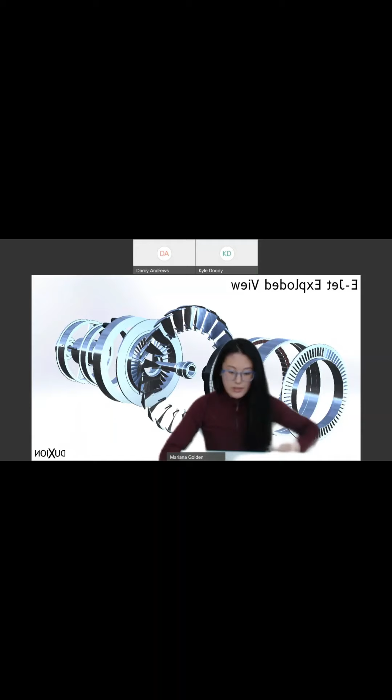All right. So I think right now you're the presenter. So okay, there we go. All right. Can you see my screen there? Yeah, we sure can. And is that showing you the full screen? We're still getting your tabs at the top. But it is full screen. Okay, I don't know if it's a particular setting on WebEx. I think you should be good. All we can see is, you know, your tabs at the top of Chrome. Okay, gotcha.

All right, so hi everyone, I'm Mariana Golden, and I'm a mechanical designer at DuXion Motors, and this presentation is on how a student team taught me that success requires you to plan for failure, and specifically multiple failures throughout the course of the design process.

So Paradigm Hyperloop was the student team that I was on. I was actually on the Northeastern side of the team. It was an international collaboration of students from MUN, CONA, and Northeastern, and that was for the SpaceX Hyperloop Competition. The team participated in Competition 2 and Competition 4, but I'm mostly going to be talking about Competition 4. I'll let you know if I'm using examples from Competition 2.

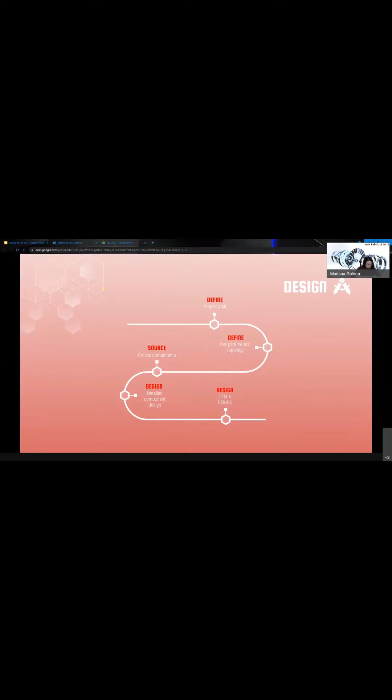So one thing that's actually really important that gets forgotten more than people would think is defining project goals clearly as your first step, because sometimes people will have a different vision for the team, and if you aren't clearly aligned on them, that can actually affect product topology, which makes it really hard to design if you're designing things with different goals in mind.

So examples of how project goals can affect topology: we had the competition 2 pod, and that was actually designed for levitation because that's what that competition had. There were kind of 2 separate streams, whereas competition 4 was solely focused on top speed. However, we decided to focus more on scalability for an actual Hyperloop concept. So we were using a motor that's a bit more realistic. It was an EV conversion motor, or a motor commonly used for that application.

Whereas the winning team for multiple years, TUM, they used to be called WARR, a German team, would always make really small pods with teeny tiny motors so that it was super light. And basically that decreased their braking force and made it a lot easier for them to safely get to top speed and stop. But those are 2 very valid ways to approach it. It was just decisions that each of those teams had to make.

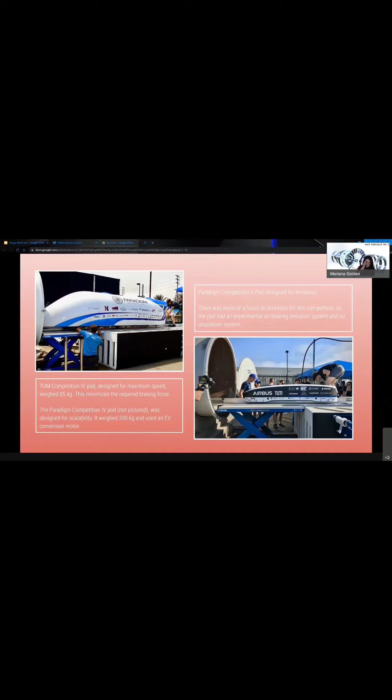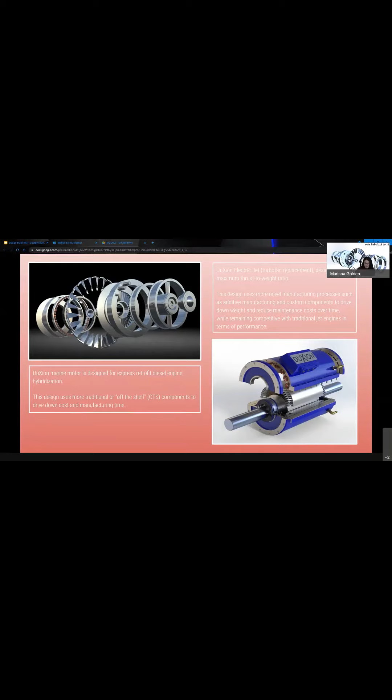At DuXion, it's actually also really important for us to define project goals clearly because we have multiple different projects with different goals. So one of our projects is the electric jet, which is a turbofan replacement, and that's designed for maximum thrust to weight ratio. This design uses more novel manufacturing processes and custom components. So it'll use additive manufacturing, and it's not designed to be manufactured cheaply, whereas the marine motors we're designing are designed to use more off-the-shelf components so that we can design them quickly and manufacture them quickly.

So once you define your project goal, the next 2 steps really are to define your topology and define your key parameters. From here on out, I'm going to mostly be using Hyperloop as an example. So this is a screenshot of a page from the Hyperloop rules and regulations, and that gave us a cross-section view of the SpaceX Hypertube. And that used an I-beam, which we clamped to for propulsion. So we're not riding on a track. It was clamping to an I-beam. And they had keep-out zones for braking for safety reasons.

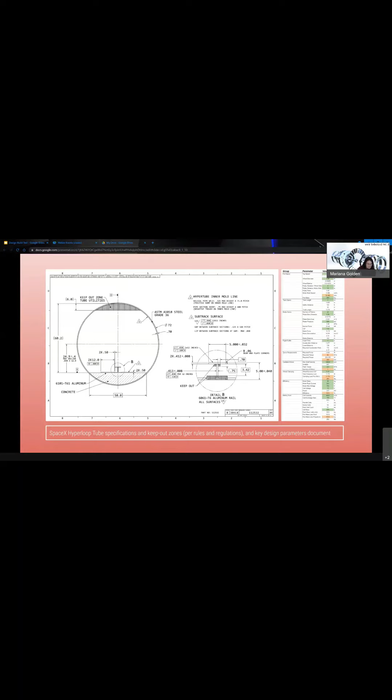And when you get key parameters, there's really 2 types of design constraints you have to design around. There's fixed parameters, which are I-beam dimensions, tube length in this case, basically environmental variables that you can't control and you have to design around. And then target parameters that you define, such as, in this case, mass, top speed, and pod length. Those are variables to target within reason. So we would always have a spreadsheet full of calculations, and that was good for team record keeping, and also it was really easy to plug numbers in and try things out when we were trying to source different components.

And then the next step that I would recommend is to source critical components before you get into the meat of the design. A critical component is basically anything that's off the shelf but has a long lead time and might need custom modifications, but it's essential to the design. So basically a part that you design other parts around. On the pod, that would have been the motor, inverter, shocks, some of the bearings that were hard to source, pulleys and belts. We ended up sourcing the belt too late and had to do a lot of scrambling and redesign since it was a lot wider than we had designed for.

Components that aren't off the shelf but need to be custom manufactured and have a long lead time might also be critical. In that case, that might have been the inverter enclosure because it was made of carbon fiber, and that has a really lengthy, involved manufacturing process. The wheels were also critical because they needed to be machined, coated, and then balanced. And the motor needed an adapter to connect to one of the pulleys because the output shaft was splined. So watch out for couplings because they can be a long lead item that you might not think of. And if stuff needs an extra operation on top of just machining, like our drive shaft needed to be hardened, that can also take a long time.

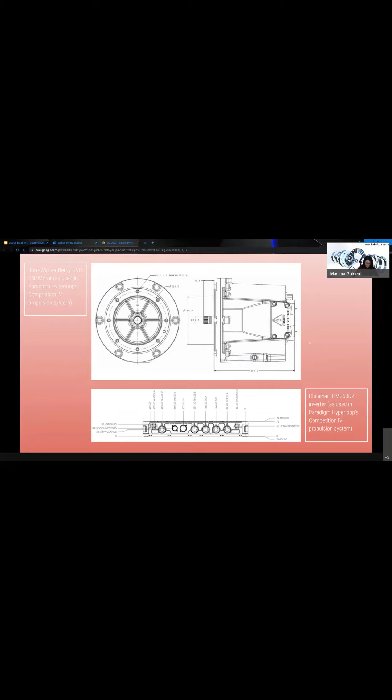Once you source your critical components, you can go into the detailed design phase. So that's where you get into detailed component design, where you're designing basically things like brackets, mounts, framing that are being designed around the critical components that you're not getting manufactured custom. And these components more typically can be made with traditional machining operations in your standard shop, like the MUN shop. So kind of mill, lathe, CNC laser cutter, water jet, etc. These are the components that you'll be designing around the critical components.

And make sure when you're doing this to start sourcing fasteners, like not just using, if you're using SolidWorks, their smart fastener thing, but actually going and physically sourcing those fasteners. Because that'll make it a lot easier in the long run, so it's not an extra step you're doing on top, and also to make sure that they actually exist. And while you're doing this, make sure everything meets the factor of safety for whatever standard you're designing for. Because we definitely made some mistakes on that end, and that can really be a showstopper.

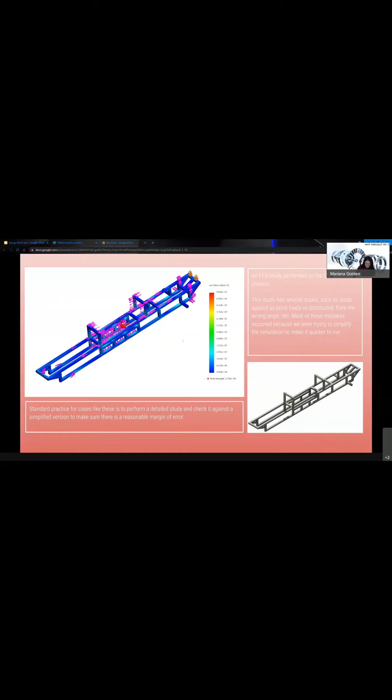We got roasted at SpaceX for this one, not only because the FEA didn't have the loads applied properly, but also because we did all the manufacturing drawings, but did not check with the manufacturer that they could hit the weld tolerance required. So that made a lot of components not be able to fit, and also significantly reduced the yield strength of the aluminum because we didn't get it heat treated afterwards. So that's something to look out for.

The chassis design was led by Connor Walrath, who worked at SpaceX and is now working at Tesla. And there's a few people that I mentioned in this presentation, and all of them have really cool jobs now. So that was a really great thing that the team did.

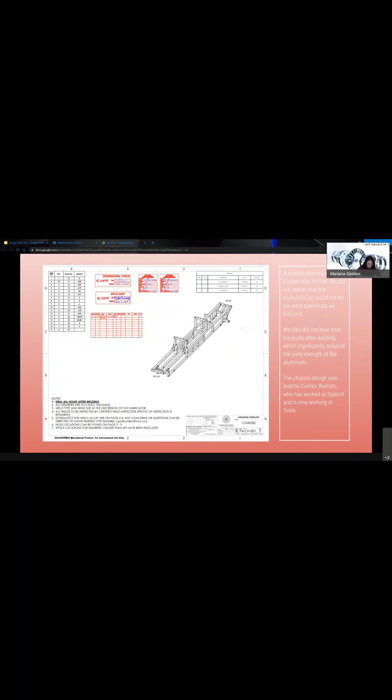This is an infamous mount block designed by my friend Rowan and me for the Competition 2 pod. And the issue with this component was that there's a lot of operations here, there's a lot of material, and it was not really designed with the milling process in mind. It was physically machinable, but really difficult and really expensive and took a lot of stock.

And one of the big challenges was that this is a through hole all the way through this entire block, meaning that you need to pass a drill bit all the way through this entire thing, and once you get to the bottom of a hole that long, the drill bit will start to walk and mess up your tolerances. And I think what ended up happening was having to drill the hole from each side really carefully, which was tricky because there was a through rod connecting them both.

Rowan later became the competition 4 mechanical lead and is now an engineer at BreathSuite. And I show a mount that he designed for competition 4 that's kind of the opposite of this.

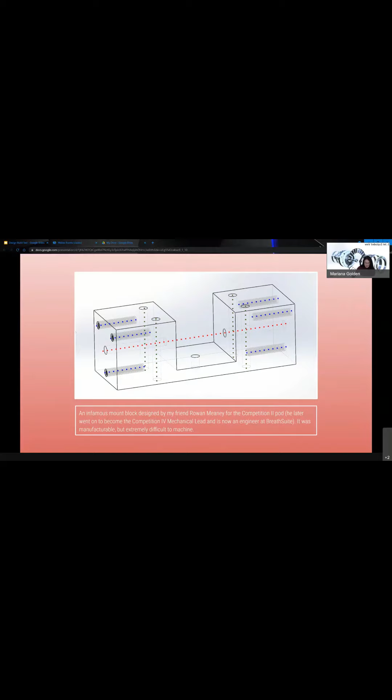So once you get through the detailed design phase, you get into the building process, and by that I mean 75% of it is manufacturing and contacting manufacturers and getting into the shop. 15% of that is not losing all the parts you get, so organization, and 10% is actually building.

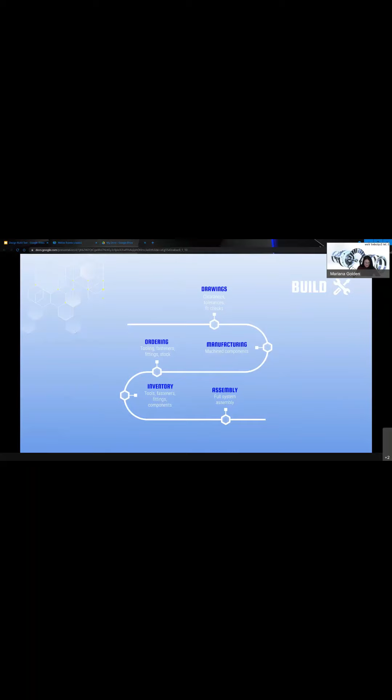When you're working on manufacturing drawings, don't forget tolerances and clearances. It's really easy, even if you know that it's a thing that's going to come up, to forget about them, because they're not a visual feature you can see. So if you already had a structural or mechanical design review and think you're ready for manufacturing, you're not. You should have a second design review, or you'll have multiple, but you should have one that's explicitly for manufacturing and goes over tolerances, clearances, and sometimes surface finishes and machining or manufacturing operations. Tolerances and clearances can also affect FEA results, so watch out for that.

So this is another mount block designed by Rowan Meaney, and this one is a really clean design. It was designed to be manufactured on a CNC machine. And since there were a ton of these teeny tiny brake housings, they were sent to an external manufacturer because it would have been tricky to do in-house, and they needed to be as light and thin as possible because there were so many of them, so that would have really added to the weight.

So yeah, once he manufactured these and we got the parts, they were supposed to have basically a sleeve fit into them, and you could just see the sleeve slowly sink into them because they were really nicely toleranced. So that's how things should work out.

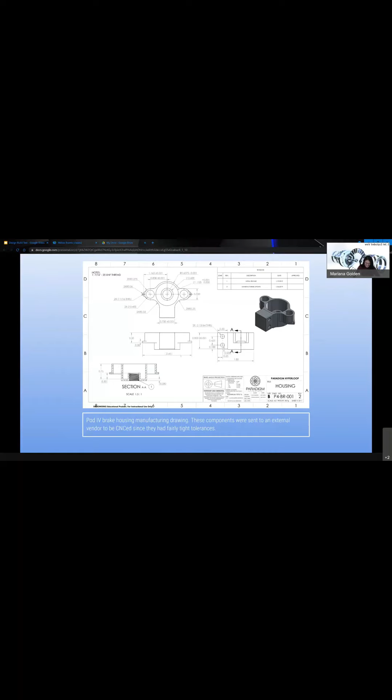And here's a really important note, and if you take anything from this presentation, I would say take this, which is that technicians, machinists, suppliers, and manufacturers are key. They're worth their weight in gold because engineers cover a breadth of knowledge, which is mostly conceptual, and people on the manufacturing side have a real depth of knowledge.

Engineers tend to think that they're better or smarter sometimes than technicians, machinists, and suppliers, and that is not true. They have a very different skill set from you, and a lot of them have been in whatever field or craft they're in for their entire life. So where engineers have a calculated knowledge of a lot of things, these people have an intuitive understanding based on years of experience. So they can really speed up the process for you.

And this also comes in really handy down the line if you talk to a lot of manufacturers and machinists, because familiarity with manufacturing processes and relationships with manufacturers helps a lot with innovative design. A lot of innovations come from using an existing technology for a totally different purpose, and interacting with this supply chain side of engineering will give you, first of all, a mental inventory of what technologies exist and give you those connections for the future.

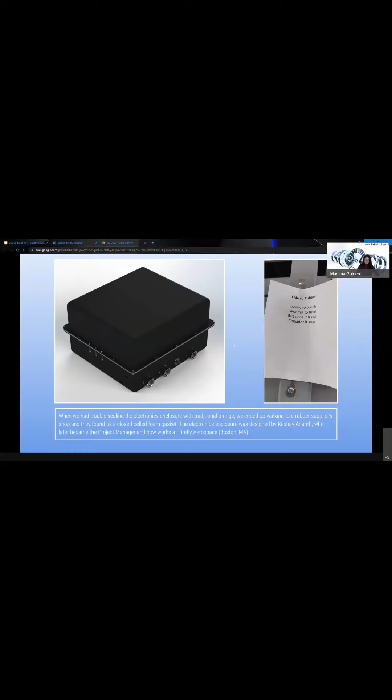And that's why it's fun to go into these places, because you never know what you're going to run into, and they just have some characters there. It's really fun, and if you know how to talk to them, they get really excited and help you in a way that design engineers don't. It's just an important perspective.

This is another example of a design that I don't really think was feasible in the long term, but competition 2 used air skates that used a flexible material on the bottom. It's basically a bag that inflated and lifted the wheels up off the ground slightly. And the material we ended up using for that bag was ripstop nylon, which is a waterproof material commonly used for parachutes. We used a sewing machine to puncture holes in the waterproof coating to let air escape and create a thin film of air under the skates to reduce friction between the bottom of the skate and the track.

And they also used a thin mesh in the middle to diffuse the air and distribute it evenly, which is commonly used in filtering applications. So this particular design was not practical at high speeds. However, sewing machines and nylon fabrics are used in a lot of heavy-duty industrial applications because of nylon's high tensile strength. So it's a lot of things that you wouldn't think of. And if you talk to a manufacturer or supplier, they'll just have these things that probably don't come up in your material sciences course, but are actually used in industry a lot.

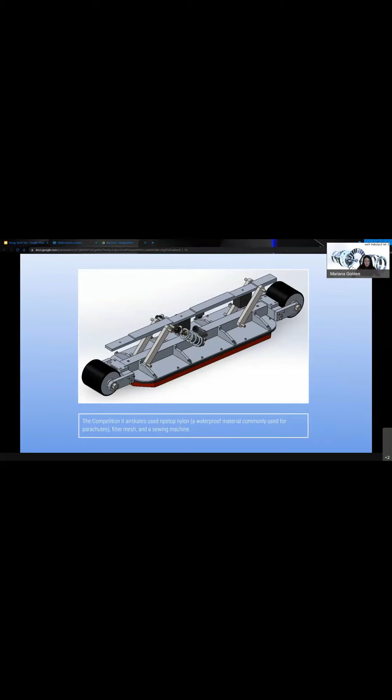So after that, when you get onto the building stage, some suggestions are to maintain an organized bill of materials and use it as a checklist when you begin to receive parts and take inventory. And that should include every fastener and fitting that you have. When you start getting your components, take inventory and mark off everything you get and everything that's late, because it seems like a lot of effort, but when you're sitting at a pile of hundreds of miscellaneous bolts and spend like 6 hours organizing them, you learn to make an organized BOM.

A tip for sourcing fasteners is McMaster-Carr, because it might not be the cheapest option and you might not actually order bolts from there. But if you use it as a fastener inventory, they have every kind of common fastener under the sun and some actually kind of cool ones. And you might find some types of fasteners and tooling you didn't even know existed. And then you can go and look up that kind of fastener and see what exists on other sites.

This is an example of one of my favorite tooling types that I had no idea existed, I was just throwing stuff into the search bar - it's a reverse counterbore tool. It has a separate shank and the counterbore top slots into it, so you put the shank into the drill chuck, then pull it backwards to counterbore the backside of the hole. A machinist might not love you if you walked in with that, but if you order it and figure out how to use it properly, it's cool to find tooling like that and search it up on websites that might be cheaper.

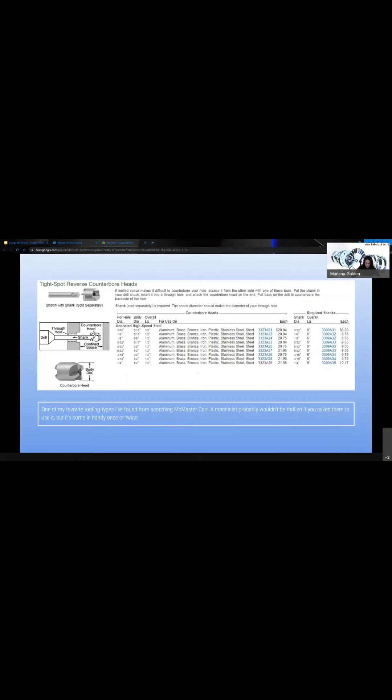Once you get onto assembly, a couple lessons learned: mechies, don't forget that the electrical side of the team exists. Communicate with them and make sure there are plans for mounting electrical routing, connectors, and fittings. Bend radius of wires is a big one that will get you, and it's sometimes hard to CAD that up or guess, so take a worst case guess at least so you have space there. Come up with assembly procedures beforehand, and know if something's too heavy to safely lift, you need an assembly jig or a gantry with loading straps and hooks - that should be in your plan before you order all the components. Make sure there's enough clearance for hands, tools, and fastening, not just the bolt head.

So this is our full pod for assembly.

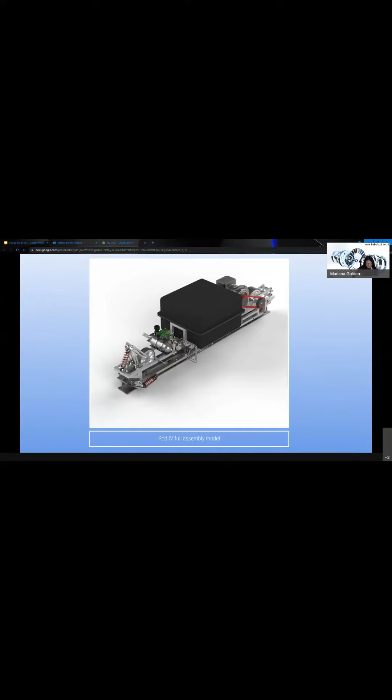When you get onto the testing phase of the design process, test rigs and SOPs - safe operating procedures - have a design and manufacturing scope all their own, so factor that into your project budget and timeline. Fit checks are probably not going to go right the first time, especially with a prototype with a lot of different components - the more components you have, the more tolerance stack up. If you have parts connecting in different ways or with surfaces flush against each other, it's not just the individual tolerance from surface to surface, it's the entire assembly tolerance stack up, so they can all affect each other.

If one part is a little bit off, they'll all be a little bit off and nothing will fit. So there may be some flexibility needed, especially if students are machining parts - try to machine parts a little bit oversized rather than undersized, just so you have a little material to take off in case it doesn't fit. Or at least double check everything multiple times with calipers and buy enough stock to make multiples.

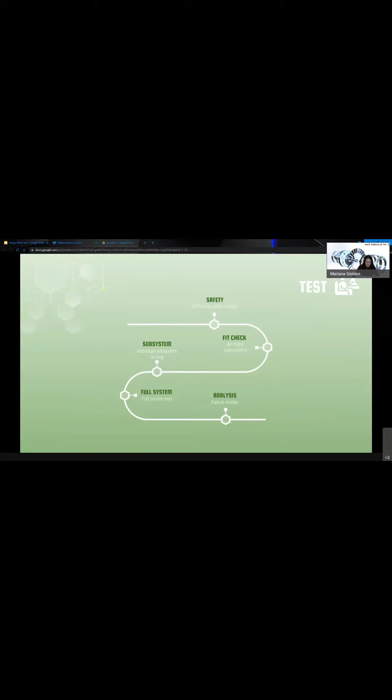Safety checks and fit checks come before any actual subsystem or full system testing. Make sure you have a safe operating procedure document written for each assembly and testing operation. These will include hazards - really basic things like pinch points on mechanical assemblies, loose clothing or hair - and might get into hazards like high voltage or high pressure systems, depending on the nature of your project.

Most of these SOPs were written by Jack Chapman, who's currently working at Hatch in Montreal.

Fit checks are pretty self-explanatory, but ours led to a huge amount of issues and rework. That's something you can try to mitigate beforehand, but really you should build time into your project timeline to fix issues if needed, and make sure to order extra stock, because if students are machining stuff, there's definitely going to be parts that get messed up at first.

To name a few examples, our suspension brackets were almost impossible to install because we had gas springs basically forcing this bracket up and into the shaft of the wheel, which pushed it down into the I-beam.

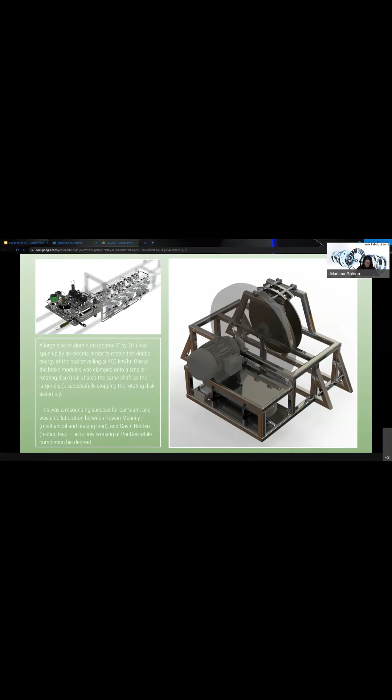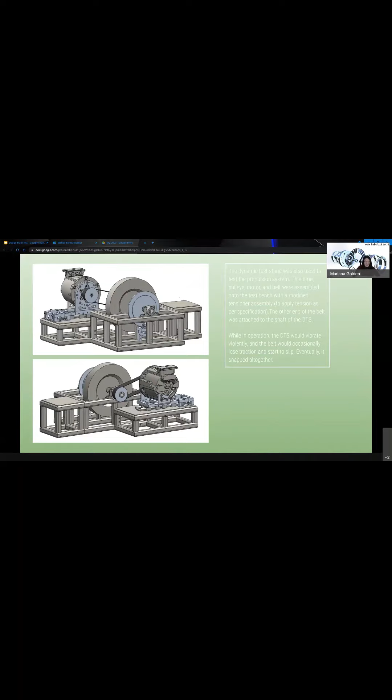This is where we ran into a lot of trouble, because the DTS, while we were running it, would start to vibrate violently, especially when we went up to full RPM and torque. The belt would occasionally lose traction and start to slip, and you'd hear the teeth on the belt grinding against the teeth on the pulley, and eventually it just snapped altogether.

Because otherwise you're loading it improperly and it'll snap. So we fixed this issue by adding spacers to the assembly, which I'm pretty sure Gavin ran down to the shop to lathe. There was a lot of last minute machining, which is common for a student team. But you learn a lot that way, especially when the shop gets used to you being there and puts up with you. Shout out to Jerry, who I think is now retired, but he really helped us out.

So that issue was solved by spacers, and that was because the shaft was not properly restrained on one end. There was a shaft collar there that was supposed to restrain it, but it wasn't doing its job properly.

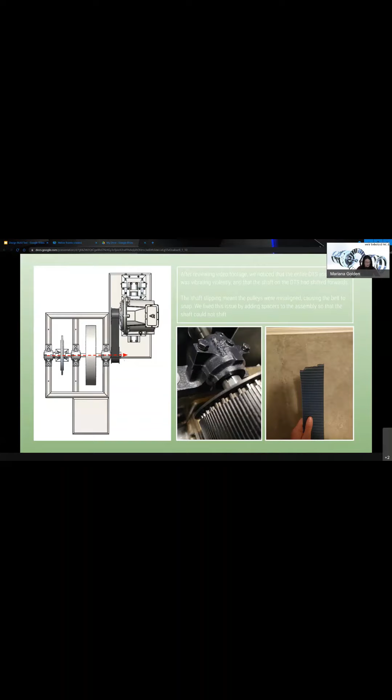A huge part of the engineering process is analysis of failure modes, which is what I was talking about on the last slide. This is part of the process and not a what if. It's inevitable in your first prototype that things are going to go wrong, so just build time into your project timeline to allow for failures.

For testing, proper sensor setup is super critical in being able to properly analyze failures. In our case, there were a lot of sensors built into the motor, and then we would have external sensors, both for the motor itself, but also in line if there's a pressurized system such as braking.

So that would have any sensors you'd have in a pneumatic system, like pressure, temperature transducers, temperature sensors. And for our electronics enclosure, we had pressure transducers in line and in the enclosure itself. There's a really huge list there, and it's not just the physical design, but also making sure you have a line that connects to the brake line or the electronics enclosure, or vents, or a port on top with an NPT fitting where you can fit in a pressure transducer or temperature sensor.

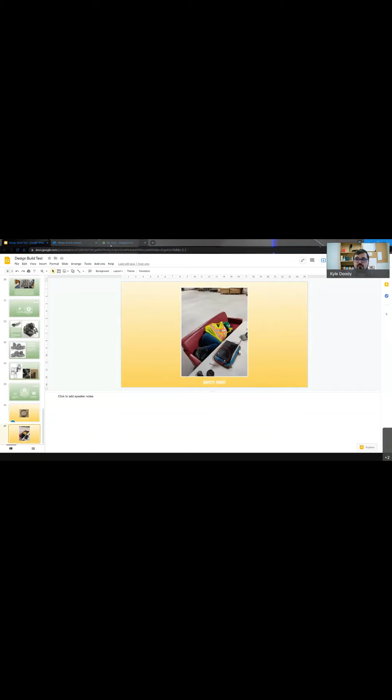So a bit of a generic one to start us off: Ari, what's your favorite part of being a designer at a small tech company? I really like that it pushes me. I think with a lot of larger companies, you'll end up optimizing a single part over and over again, and we do that here too, because that's part of anything really.

But I like that it pushes me to look at the full system and the full assembly. That's one thing I really like, assembly modeling, because you get a really good sense of the system as a whole, which I think can sometimes lead to better designs.

Awesome. So earlier in your presentation, you mentioned that not accounting for the bend radius on wiring might impact your designs. Want to elaborate on that a little bit? Yeah, so on our electronics enclosure, the inverter had these huge wires coming out of it—some of them were like an inch in diameter, the fitting itself, on the ID.

Those wires have a massive bend radius, and you don't really think of wiring as a component that's going to get in the way of other stuff, but then it does. It sucks, and it definitely helps in terms of CAD to try to look up the vague bend radius of a wire and actually physically put the wire in there.

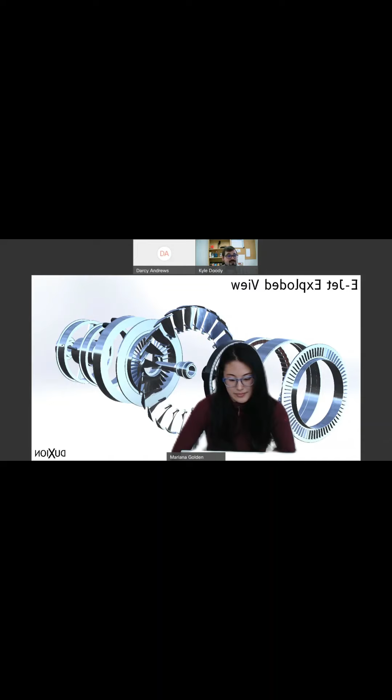So, how was the weld joint analysis using finite element, or FEM, done? Maybe I'm misreading that. Mariana, can you see the question? I don't think I can see it. Okay, let me send it to you. There you go, might have popped up there. Okay, there we go.

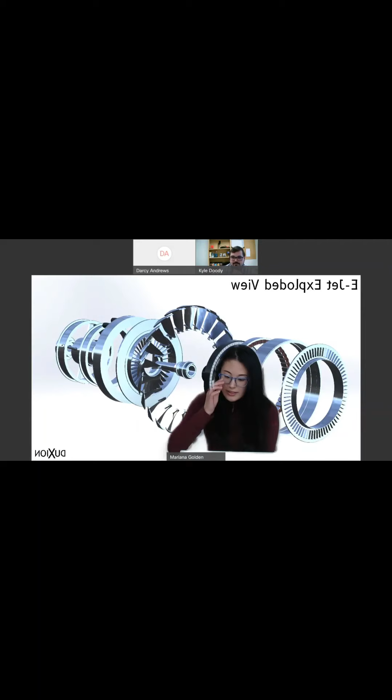Okay, so for the weld joint analysis, actually, we did not do this right, for the record. I would recommend — we were using SolidWorks for most of this analysis, but if you can use ANSYS, even the student version, or there are other softwares that will give you trials. A lot of times if you reach out to ANSYS or something like that, they will give your student team access to it specifically for the team. I don't know if MUN has stuff in terms of that. But SolidWorks is okay for basic structural simulations, like you have a beam here and a fixed contact point, but it's really not great when you get into any variable material properties, where you're hardening something, or if it's carbon fiber, if it's composite. It's really not comprehensive in terms of that, and sometimes you'll get results that are completely inaccurate.

So yeah, I would say if you can avoid SolidWorks for stuff like that, because that's what ended up happening. We went into SpaceX and they told us, because you didn't harden this joint, the strength of the assembly, the factor of safety, was like not even one at that point. So yeah, that's something to definitely watch out for, and also do some hand calcs to check everything out and make sure that you're setting up your simulation correctly, just as a sanity check.

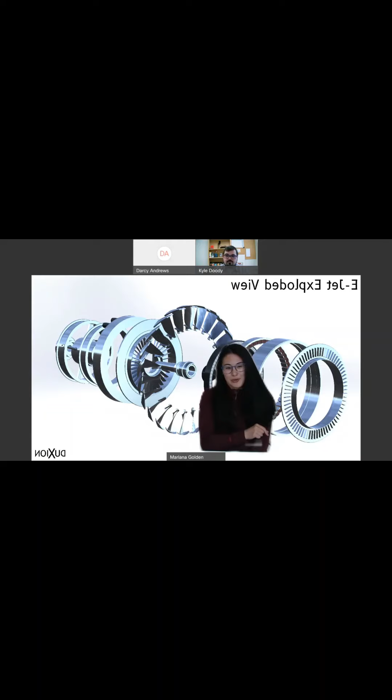And I'd also say in terms of avoiding delays, one thing that really comes to mind is tolerances and clearances. If you don't have someone on the team who's super experienced with that, talk to a machinist or someone who's experienced with design for manufacturing to make sure that you're, first of all, dimensioning everything correctly and also tolerancing correctly, because there's a specific design practice for manufacturing drawings, and if you do that wrong, you'll confuse the manufacturer and you might either get parts back wrong or they'll send you back the drawing and say, I don't know what this means. But there's definitely resources to figure out how to do that properly, and that will save you a lot of time.

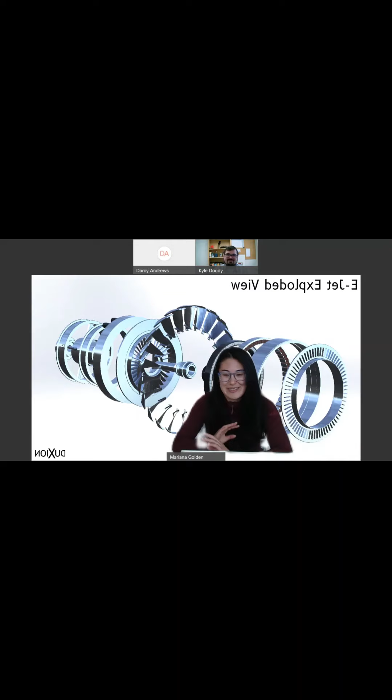And then another thing is organize your bolts and fittings and really stay up to date on your bill of materials, because those things really creep up on you, and if you don't organize them, you'll end up wasting money, because I guarantee you'll lose bolts and then you'll buy a couple and then you'll start being okay with buying more and more, and this is something that I was super guilty of. It wastes time and money, and then people start hoarding bolts because they don't want someone to take them, and it's bad. So organize your bolts, put them in little cubbies or something and label them. Those things take up way more time than you'd think.

So we're almost at time, so we're going to squeeze in one more question. Another one from Dr. Silva. If you can name one critical thing that you wish was covered in your school related to mechanical design, what would that be? Oh, that's a really good question.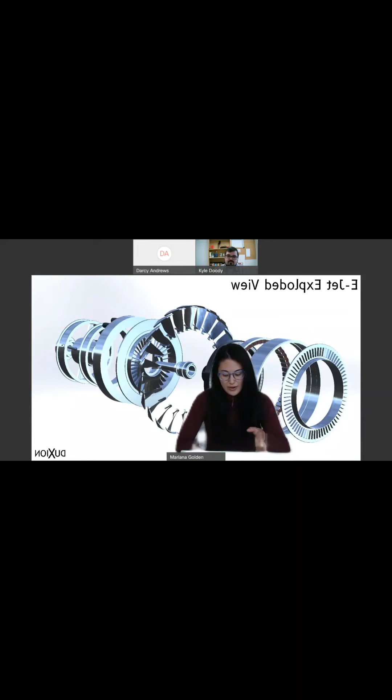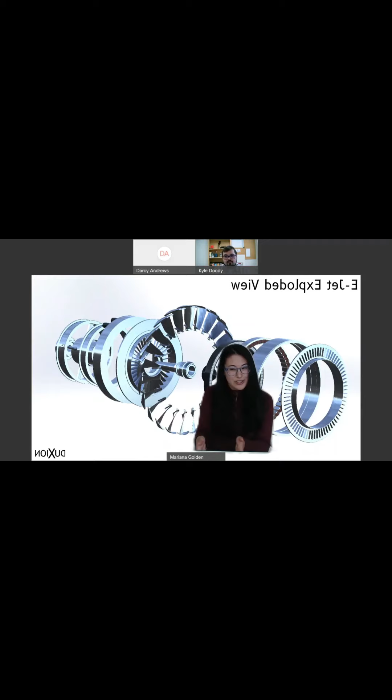I would say a lot more on, again, what I was saying on that slide. There are material science courses, manufacturing courses, but if there is some type of course, maybe, I don't know what you guys call it at MUN, but like the general engineering introductory course, but for manufacturing, where you not just conceptually look at material properties, but have to apply that and practice designing for manufacturing in terms of drawings and different types of materials.

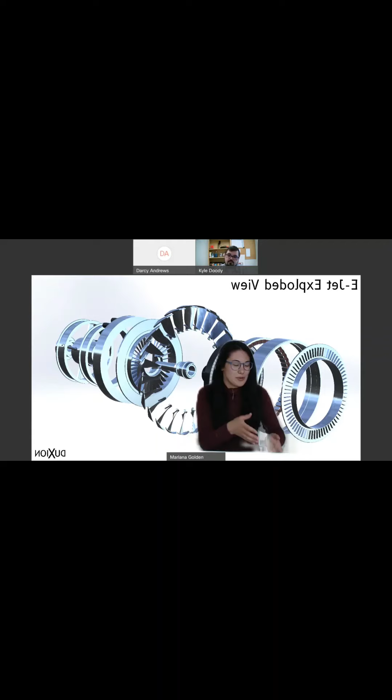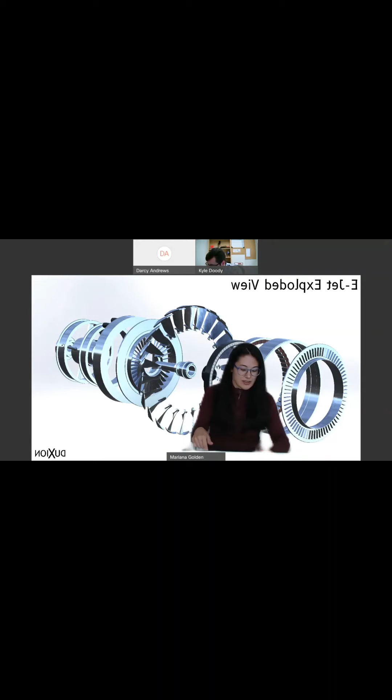So not just your standard. I think being on a team really pushed me to use materials that you wouldn't usually use to save weight, and how that ties into simulation as well, because there's a lot of basic, conceptual simulation, but if you're doing it for manufacturing, there are some courses that will talk about composites or weld joints, but it would help to have one focused specifically on the elements of the design that you'll need to simulate for manufacturing.